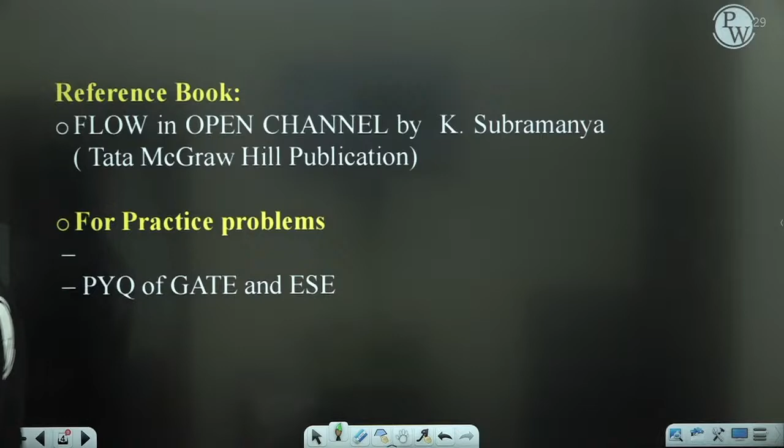Now, definitely you will be asking, sir, which books do we need to follow as a reference. First of all, as a reference, you can use any one book, don't go for multiple books, that is a time waster for you. So one book I am suggesting to all of you, which you can refer comfortably, is Flow in Open Channel by K. Subramanya, Tata McGraw-Hill publication.

This you can refer. And other than classroom questions, you are having GATE and ESE previous year questions, so that you can try for the practice part. With this course, these two things you need to do for every topic, every discussion: reference book and practice problems. I know you guys will be asking which books to refer, so this book you can refer.

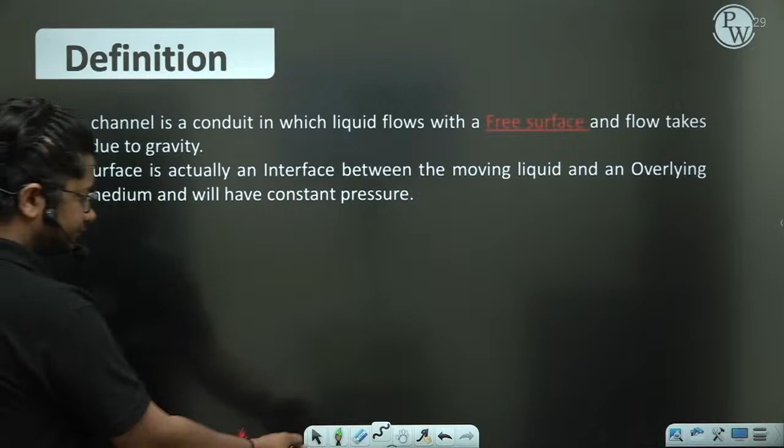Now comes the open channel flow technical discussion, introduction part. In open channel flow, if somebody asks you, sir, what is an open channel? Open channel is a conduit in which liquid flows with a free surface, and flow takes place due to gravity. You have already seen examples like river, irrigation canal, or any stream which is flowing; in all of those, one thing you will find common: these are nothing but a flow which has a free surface.

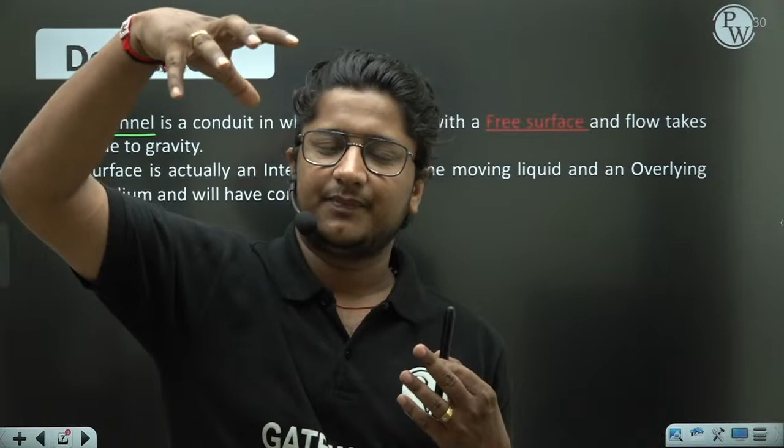Then what do you mean by free surface? Free surface is basically an interface. It is an interface between the moving liquid and the overlying fluid medium. In our case, the moving liquid is water and the overlying medium is atmospheric air. So that interface between the moving liquid and the overlying fluid medium, we are naming it as free surface. This free surface is like an identification mark.

Wherever it will be there, we can call it open channel flow. In open channel flow, it must be there. Without a free surface, you cannot call a flow an open channel flow. That should be very very clear in your mind.

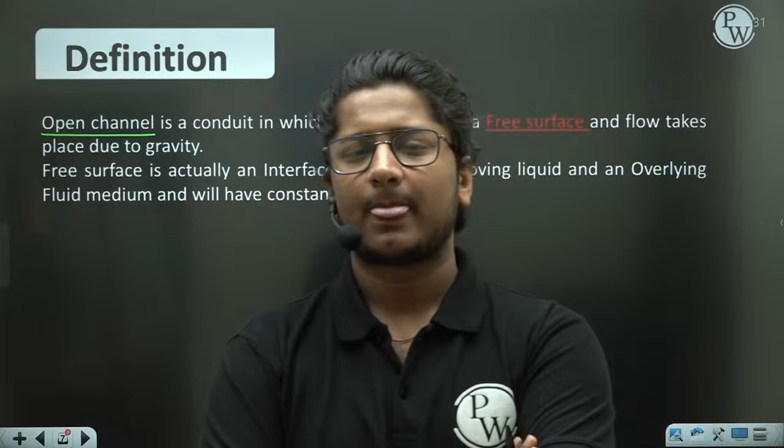Now, as it is a free surface, the pressure will be which pressure? Throughout the motion, throughout the flow, which pressure will it be carrying? The water will be carrying which pressure? I'm asking this to all of you. As it is a free surface, as it is open channel flow, in that case, on the top, which pressure will it be carrying?

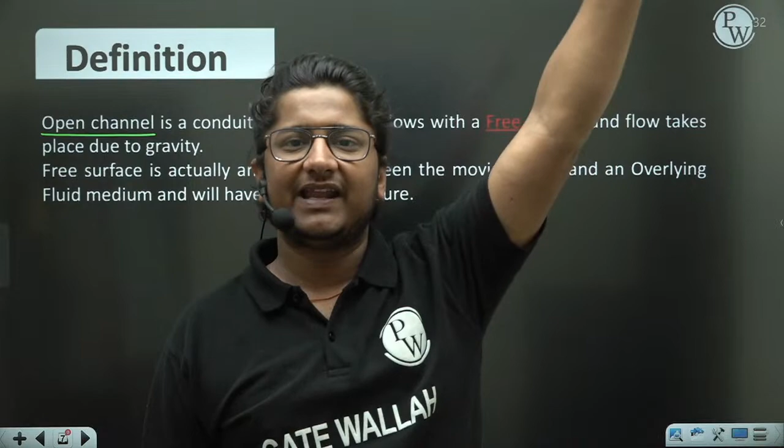Atmospheric pressure throughout the flow will be taken as constant, because generally we design for a particular length of the section of the river. In that particular length, atmospheric pressure is taken as constant. That does not mean that if a river like Ganga is flowing from Himalayas to Bay of Bengal, the atmospheric pressure will be same throughout. At Himalayas there will be different atmospheric pressure, and at Bay of Bengal it will be different. But if you are taking only 1 kilometer length, you will not find much difference in atmospheric pressure.

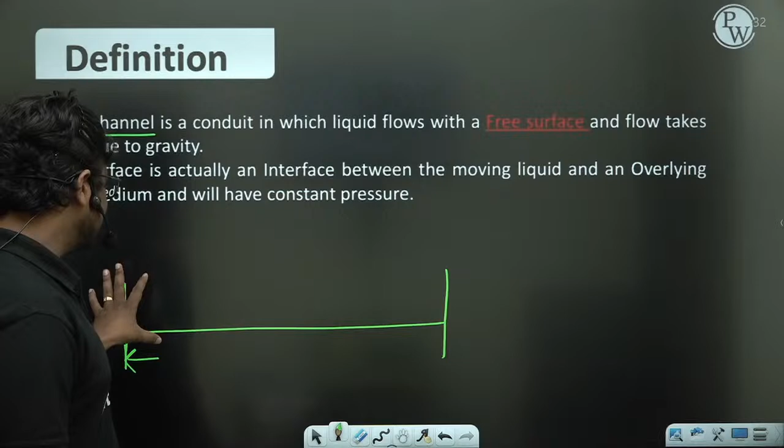For example, if you take this section of the river, say 1 kilometer, here and here you will find the same atmospheric pressure. But if you consider one point in Himalaya and one point in Bay of Bengal, then it will be a different atmospheric pressure. You guys already know this.

So free surface, open channel flow - what is the meaning of this? What is the general meaning of this? I think this is clear to all of you.

Another point which I have written here, which you can see, flow takes place due to gravity. Just like a river is always flowing due to gravity. Because pressure is the same only, elevation head is the only thing. That is the main reason I will say for the flow to occur.

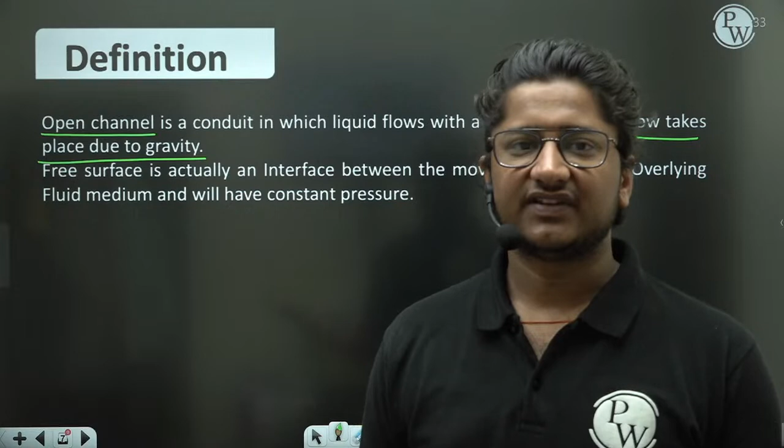That is the reason, if because of elevation difference the flow is occurring, that is nothing but because of gravity. It is like if I throw some water from the 10th floor, it will definitely go to the ground floor. Why? Because of head difference, elevation difference. So if elevation difference is the main factor for the flowing, definitely gravity forces will be in picture, and if gravity forces are in picture, this part you will study later.

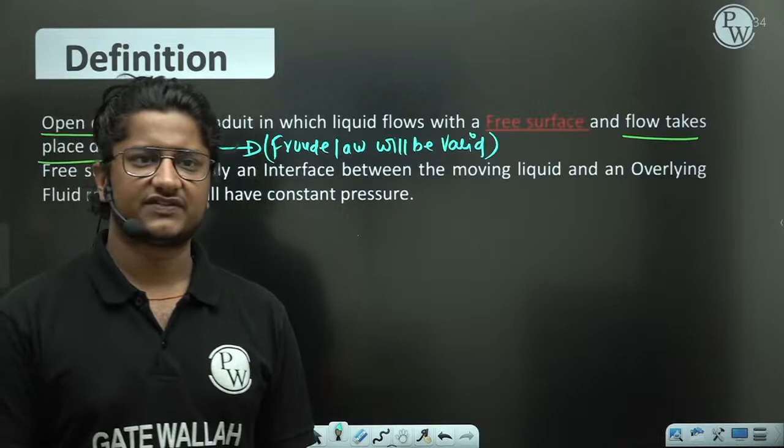If gravity force is in picture, Froude law will be valid. This part you will study later in the dimensional analysis chapter for fluid mechanics. But here also I can tell you that wherever gravity forces are important, Froude law will be important, because Froude number is root under inertial force upon gravity force. This formula you will study in dimensional analysis chapter in fluid mechanics. But this part you can remember, that Froude law will be valid.

Okay, I think this is clear to all of you. Now comes the practical situations of OCF. So many examples already I have given to you, you guys can note down those examples. First example is like sewer - sewage flow in sewer line.

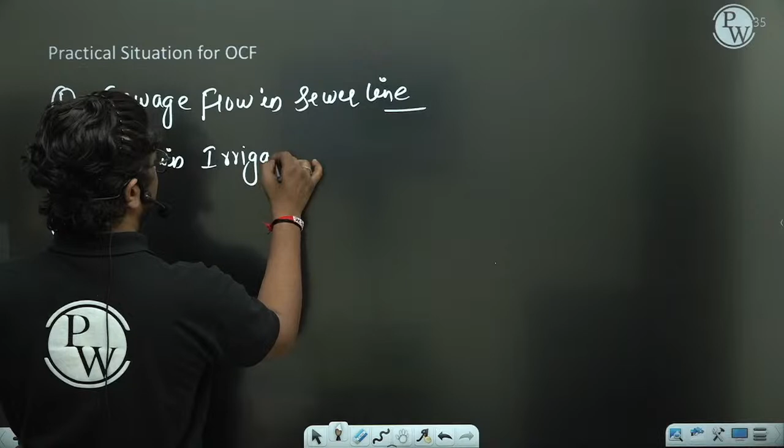Irrigation canal - flow in irrigation canal. Flow in a river. These all are nothing but examples of OCF, examples of open channel flow. Any other example?

Bharat Sharma, you wanted to study SOM first, but right now I am teaching OCF, so first focus on this. Whichever topic is coming to you, first focus on this. Whenever SOM will come, that also you can study.

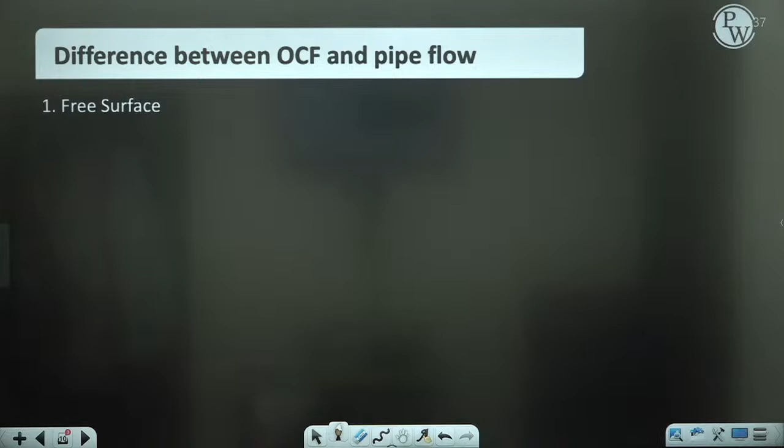Now the next thing is difference between OCF and pipe flow. See, whenever a new topic comes, we always compare it with things we already know. So why are we comparing open channel flow with pipe flow? Because pipe flow is something already known to all of you. Now we are comparing OCF with pipe flow so that we get a much clearer picture for the OCF part, and we get some new points related to the OCF part.

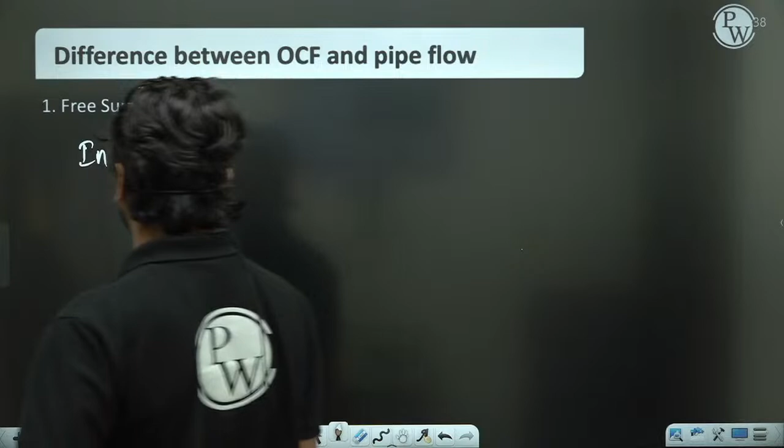First thing is the free surface, which I already discussed with you, so write down that part. In pipe flow, meaning in a pipe, complete full depth flow is occurring - that is called pipe flow, where pressure dominating flow is going on. So in pipe flow, no free surface will be there.

In OCF, as I just told you, free surface will be present.

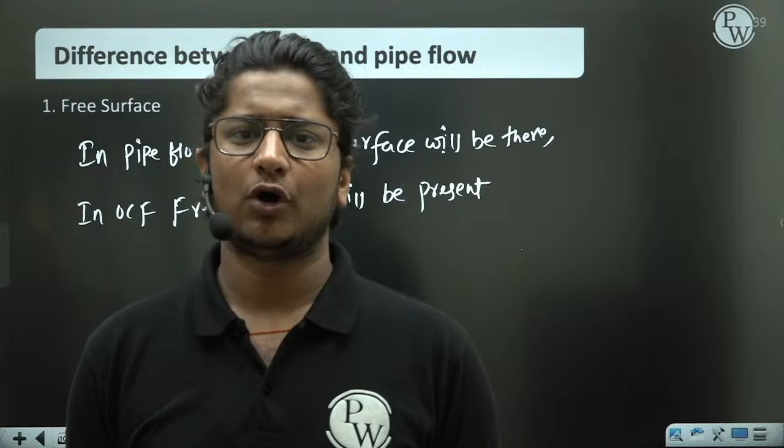Sir, is oceanic current an example of open channel flow? See, wherever in open channel, like for example surge, tidal waves, these are examples of OCF only. These are examples of open channel flow only. Is that clear, Ajay? Now in OCF, free surface will be present.

Now this statement you guys are already knowing. Something extra which I am giving to you is regarding pressure. In OCF, throughout the flow, atmospheric pressure is prevailing.

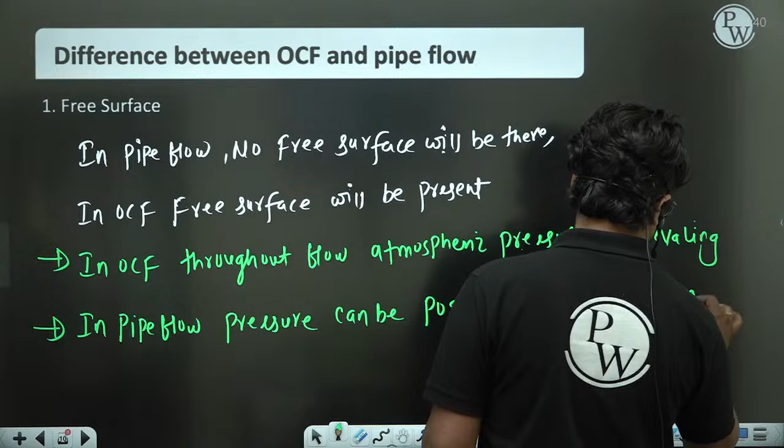In pipe flow, pressure can be positive or negative. What do you mean by this? Like in a pipe flow, pressure can be sometime positive, more than atmospheric pressure, positive gauge pressure, sometime negative gauge pressure, or sometime it will be less than atmospheric pressure. Like in siphon pipe, negative pressure is there, so it is less than atmospheric pressure. Sometime it will be more than atmospheric pressure.

So in a pipe, both type of pressure can exist, but as in OCF, it is a complete free surface flow. So in that case, only atmospheric pressure will be prevailing. No, neither positive nor negative. Is that clear? So this point, this new point, or I will say a very important point, just note it down, my dear.

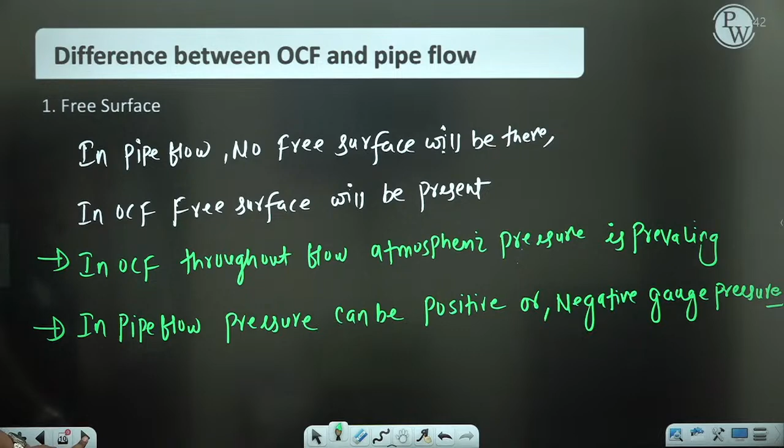Okay. Is it noted? Is it noted for everyone? Is this part noted for everyone?

First, the first difference I think it's clear to all of you. Now the second difference we are talking about is the direction of flow. Now listen, directly write down the statement first. We will discuss this part, but first write down the statement. In OCF, flow takes place due to...

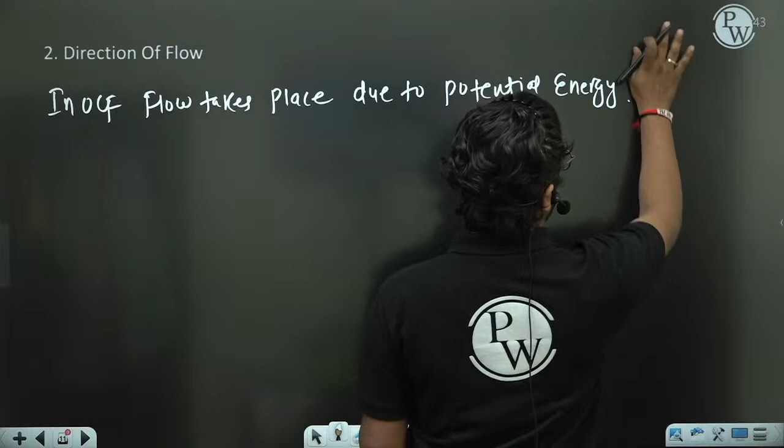potential energy gradient. In pipe flow, flow takes place due to total energy gradient. What do you mean by this?

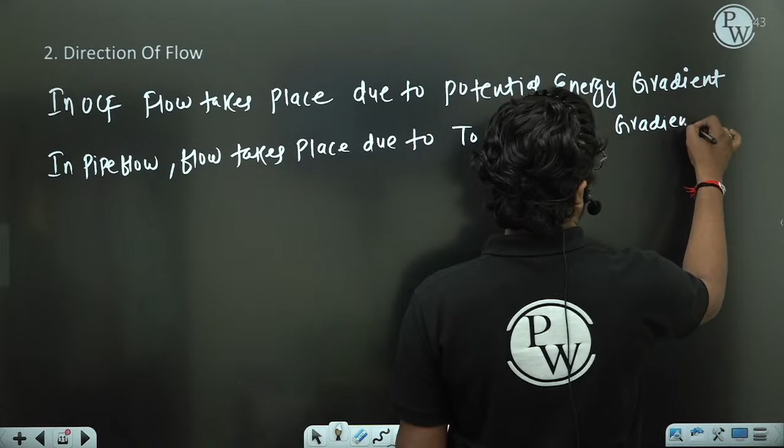In a pipe flow, if flow is occurring from one point to another point, that means there will be some total energy difference, total energy gradient, then only the flow is occurring. What do you mean by total energy? That means pressure head plus velocity head plus elevation head, P upon rho g plus V square upon 2g plus z. This is something we are calling total energy. But in OCF, only the potential energy gradient is important for all of you.

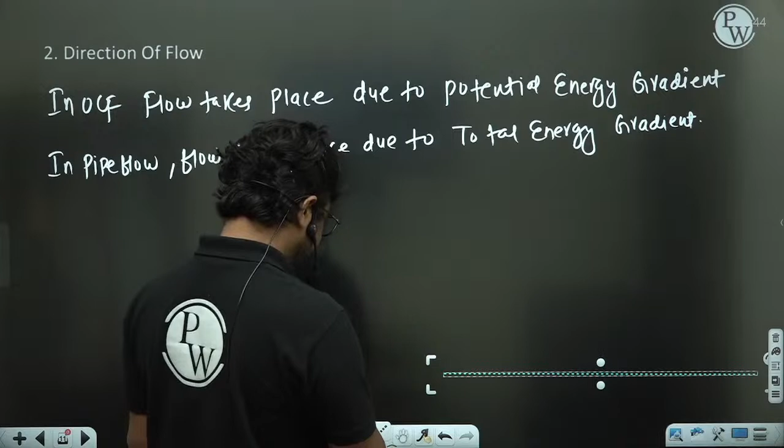Now try to understand this part in a form of figure. So let me draw. Now this is the datum. This is the channel bottom. This is the water surface line. And this is the total energy line.

As you know, complete atmospheric pressure will be there, so this is the water surface line also. The same line we also call as hydraulic gradient line. This we call as total energy line. And this is nothing but the channel bottom.

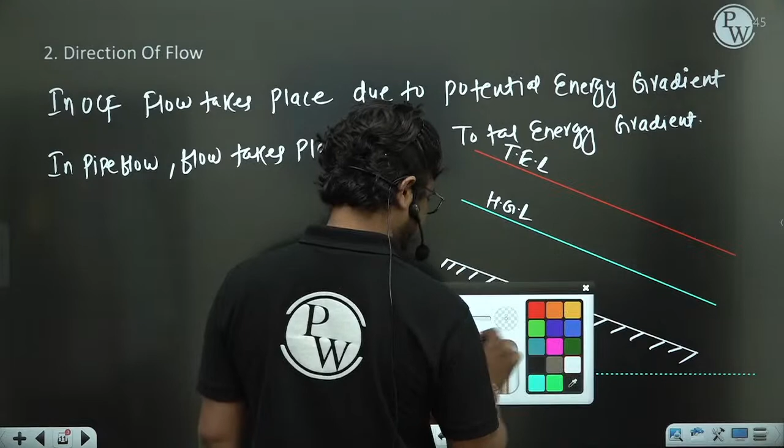This is the depth, or you can say Z, this is the elevation part. This is the depth of flow. And this is the velocity head. When you talk about pipe flow, generally we write P upon rho g. But as it is atmospheric pressure, here P upon rho g will be nothing but the depth only.

So pressure head plus elevation head, this complete will give you piezometric head. You guys are already knowing about piezometric head, but those who don't know, they can note it down. Piezometric head here is Y plus Z. This we call as piezometric head.

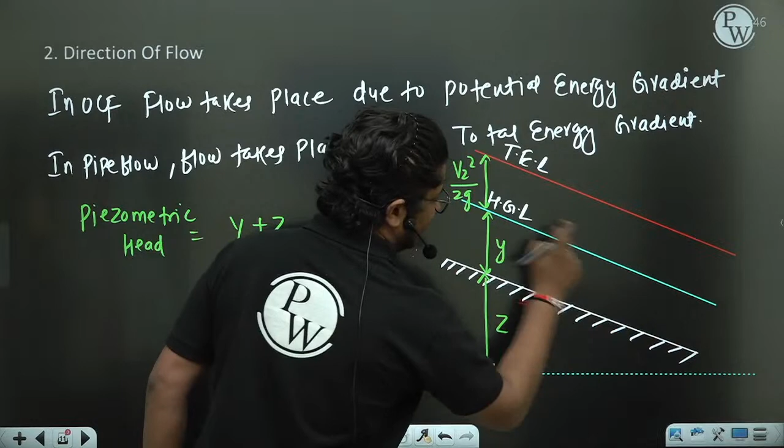And this water surface line is actually, you can see like this, this hydraulic gradient line is coinciding over the water surface line. So HGL means hydraulic gradient line, and hydraulic gradient line is actually representing the piezometric head. Throughout the flow, wherever the piezometric head will be there, if you join all those points, you will get hydraulic gradient line. Here specifically in open channel flow, this hydraulic gradient line is lying over the water surface only. So water surface line and HGL line are coinciding in OCF only. It is only possible in OCF, not in pipe flow.

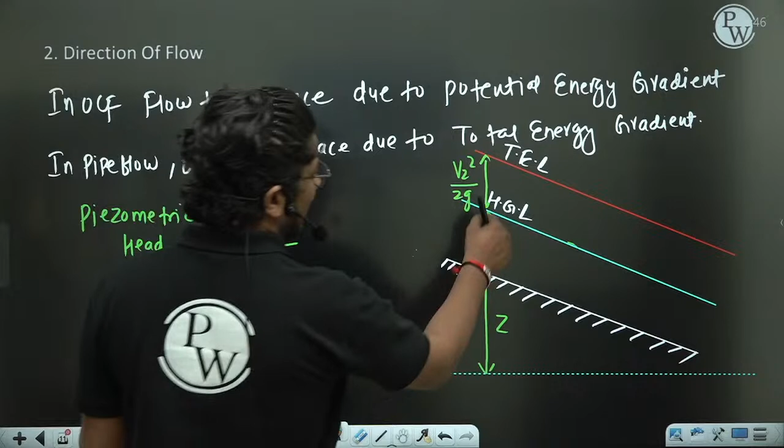So HGL, TEL, this you have understood. What about total energy line? So at every section you will be having different total energy value throughout the flow. If you connect all those points, you will get a line that we are calling TEL.

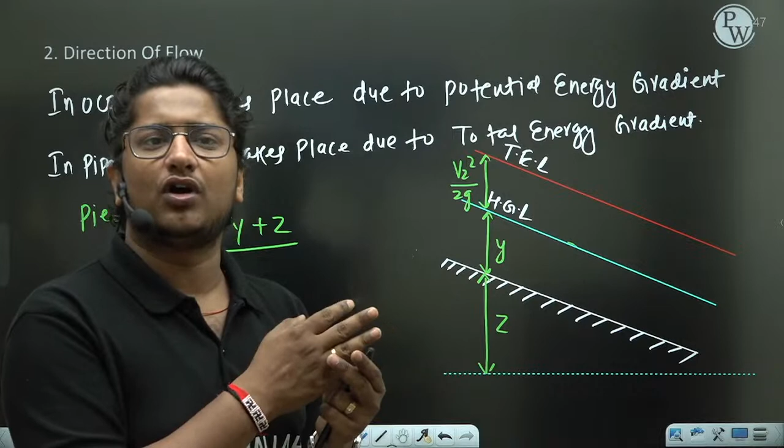So TEL, HGL, potential energy head, piezometric head, total energy head - these concepts are clear now, because this part is already discussed in pipe flow. For those who have not completed the pipe flow chapter from anywhere else, I am telling these points. So what do you mean by TEL? What do you mean by HGL? What do you mean by piezometric head? Is it clear to all of you?

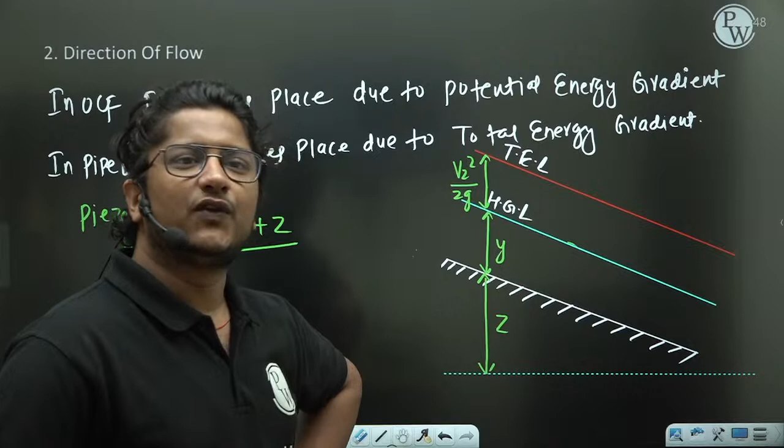Okay, very good. So now piezometric head you have understood, total energy head also you have understood, everything you have understood. Now in general, we say flow occurs when there is a difference in total energy head. So let us talk about this condition.

So two sections I have taken. One section is at this point, another section is at this point. So you want flow, sir? Flow I want. So in flow case, for flow to occur...

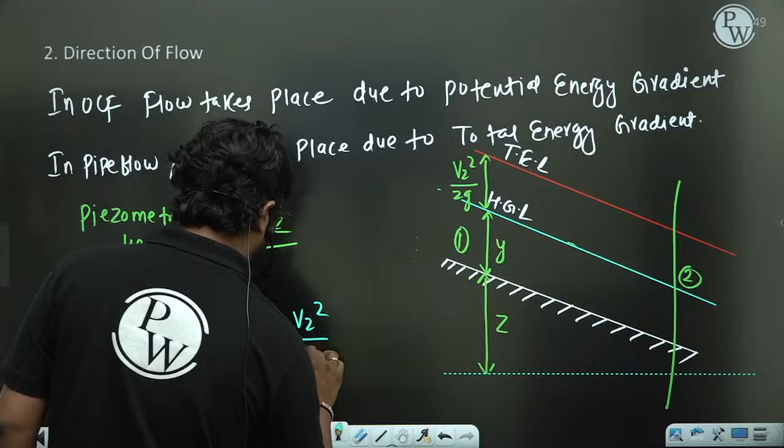P1 upon rho g, or in place of P1 upon rho g, directly I am writing y1 plus V1 squared upon 2g plus Z1. If you want flow from 1 to 2, definitely at 1 you will have more total energy head, at 2 you will have less total energy head. So this will be greater compared to y2 plus V2 squared upon 2g plus Z2.

If you want flow to occur, here the total energy will be more compared to 2. Is that clear? Now in this, some extra condition what we are adding here.

Look at here. Generally what we have seen is, if you are dealing with 1 kilometer length of river, in a 1 kilometer length of river, you will not find much difference in the depth part. Like for example, if you have taken a 2 kilometer or 1 kilometer stretch of the river, depth will not be changing. So we can call that depth is constant, depth is not varying.

So if depth is not varying, in a particular stretch, or in a particular section, or a particular length of the river also you can say.

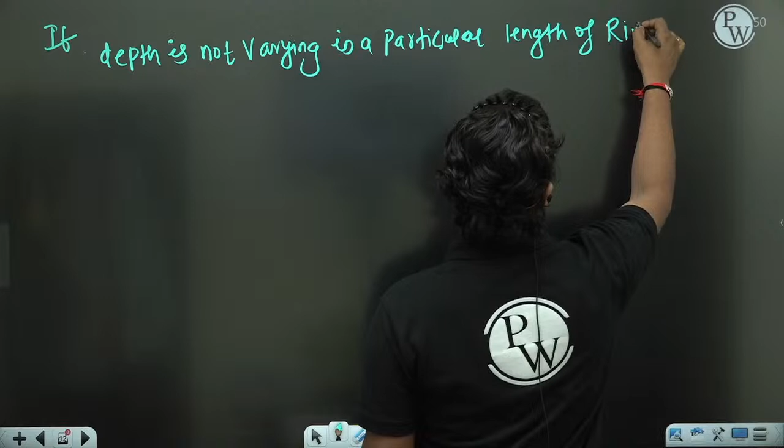So if depth is not varying, my dear, Q is already constant. Discharge we have already taken constant. So can I say that even velocity will be also constant?

Because V is what? V is discharge upon area. As depth is constant, Q is constant, width anywhere we are not changing. So can I say that if depth is constant, even V is also constant in that case? Can I say this? So if depth is constant, V is also constant.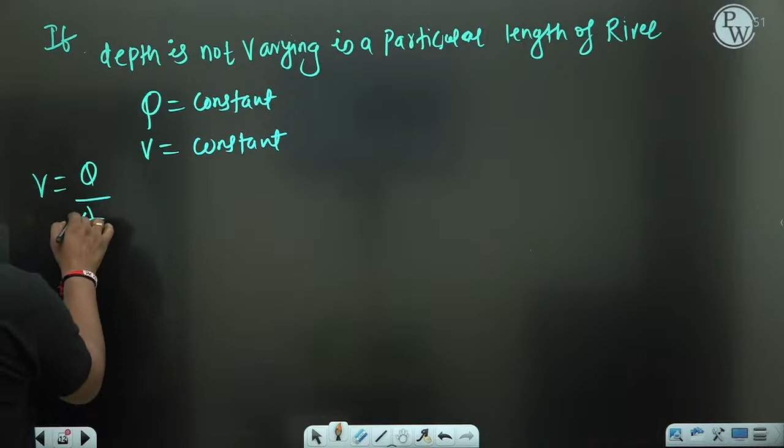Both are constant here. So in that case, my dear, V is equal to Q by A. So if depth is not varying in a particular length of river, Q is equal to constant, V equal to constant. So if Y and velocity, these two things are constant only, then these parts we can remove it now.

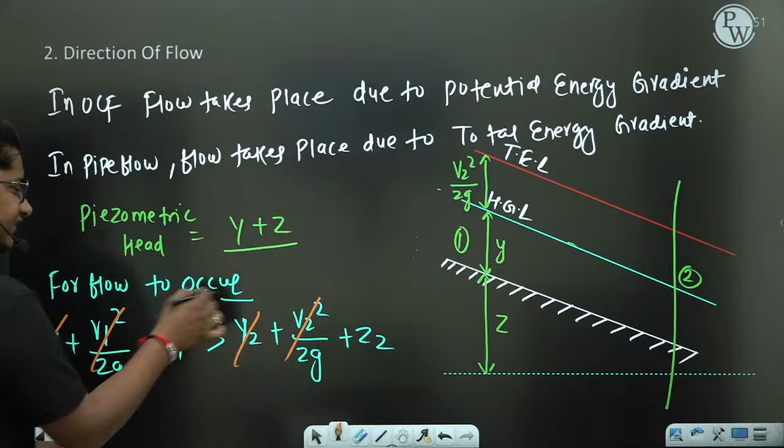These parts we can remove it, anywhere this is constant only. So Z1 and Z2. After that, what we are getting here? Z1 greater than Z2. What do you mean by this?

If flow is to occur, Z1 should be more than Z2. What do you mean by this? It is a gravity flow. When flow is occurring only because here Z1 is more, here Z2 is less, in that case we can call this gravity flow.

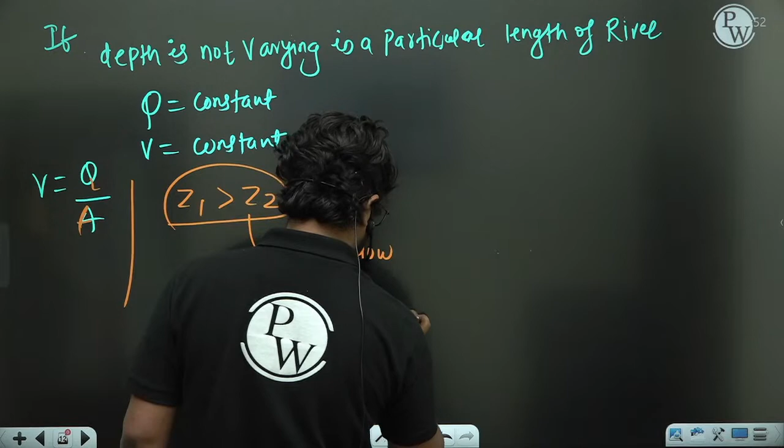Okay, so as a note, you all can remember this thing which I am telling you. First point: HGL will always coincide with the water surface in open channel flow.

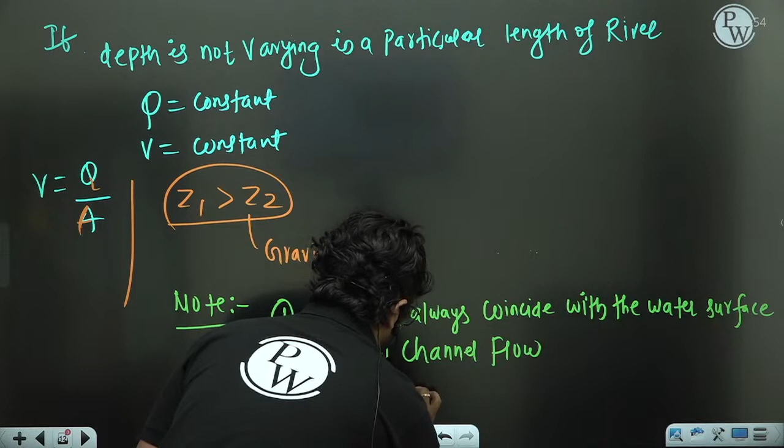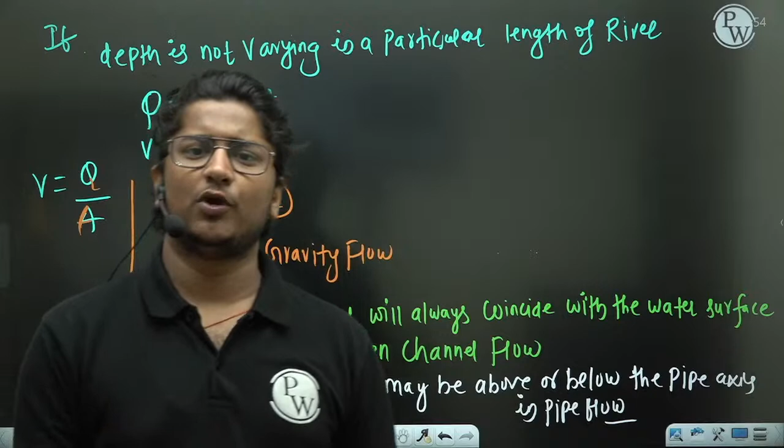HGL will always coincide with the water surface in open channel flow. Second point, HGL may be above or below the pipe axis in a pipe flow. In pipe flow, the HGL line will not always be on center, not always on the pipe axis. It can be above the pipe axis, or sometimes below the pipe axis. If there is more pressure, positive pressure, it will be above the axis. If negative pressure, it will be below the axis. So HGL may be above or below the pipe axis in pipe flow, but in open channel flow, HGL will always coincide with the water surface.

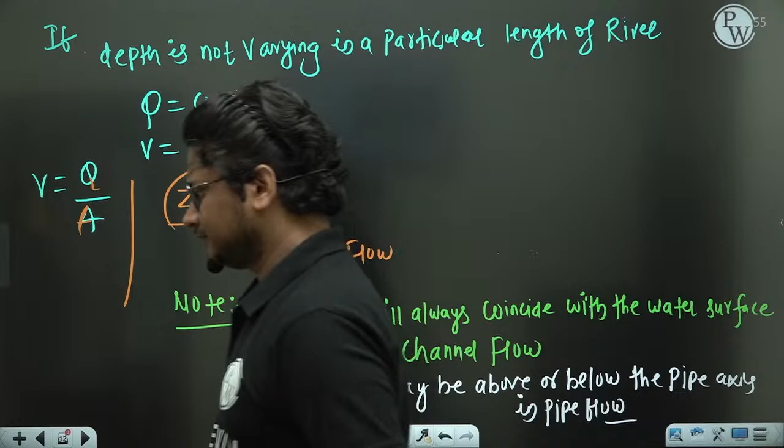This point you need to remember. Is it clear now?

So direction of flow, that is the second basis of difference that we have understood. Now we are going to the third basis for this difference. Based on velocity distribution, how open channel flow and pipe flow are differentiated, that we are going to see in this part.

Look at how the velocity distribution is there in open channel flow first. I will be discussing about open channel flow. This is the channel section. I'm showing the velocity distribution to all of you.

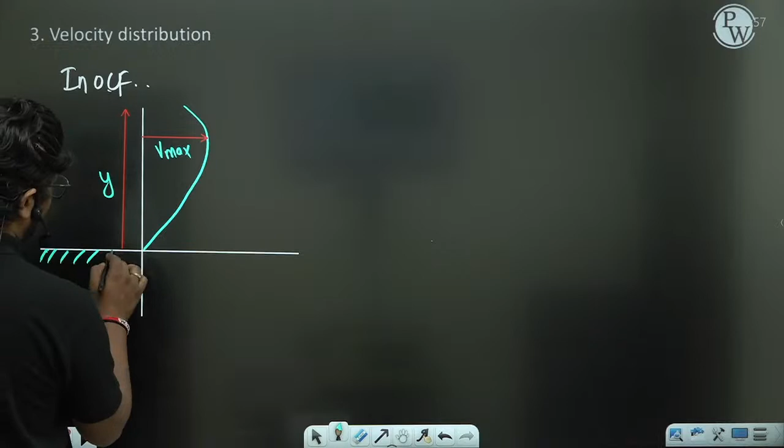Here you are finding the maximum velocity. This is the depth part. As you are going away from the bottom line, your velocity is increasing, and according to this logic, on the top you will find the maximum velocity. But as you can see in this velocity diagram, the maximum velocity is not at the free surface. It is somewhere below the free surface. Generally this distance is taken as 0.05y to 0.25y.

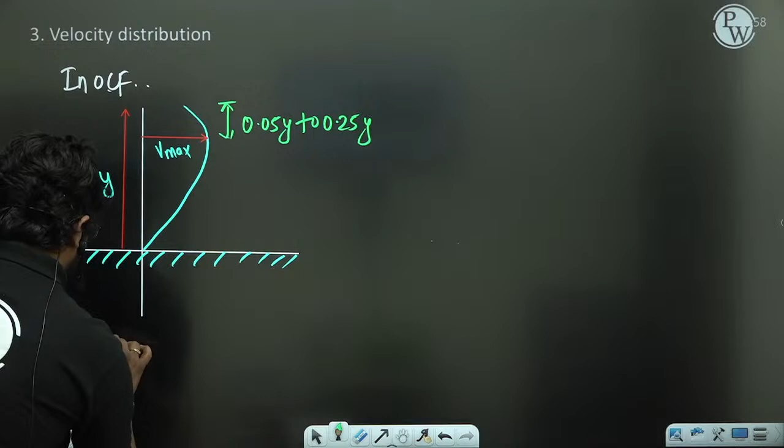So first statement, if somebody asks you: generally in open channel flow, flow is primarily turbulent flow. That's why you know that in turbulent flow, the velocity distribution will be logarithmic. So generally in open channel flow, flow is primarily turbulent, that's why velocity distribution is logarithmic.

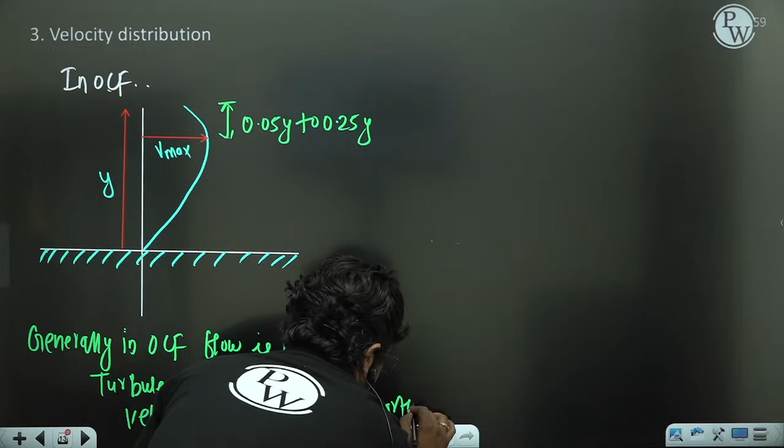Now here we are not getting the maximum velocity on the top, we are getting it somewhere below the top. Why? Can anybody give me the reason why? According to the logic, as you are going away from the disturbances, your velocity is increasing from the bottom to the top. But with this logic, on the maximum top surface, you need to find the maximum velocity. But that we are not getting. We are getting it somewhere below the free surface. So what is the reason behind it? What are the possible reasons? Anybody who can help me? What is the possible reason here?

Reasons for maximum velocity not at the top surface. What are the possible reasons, my dear? Anybody who can help me?

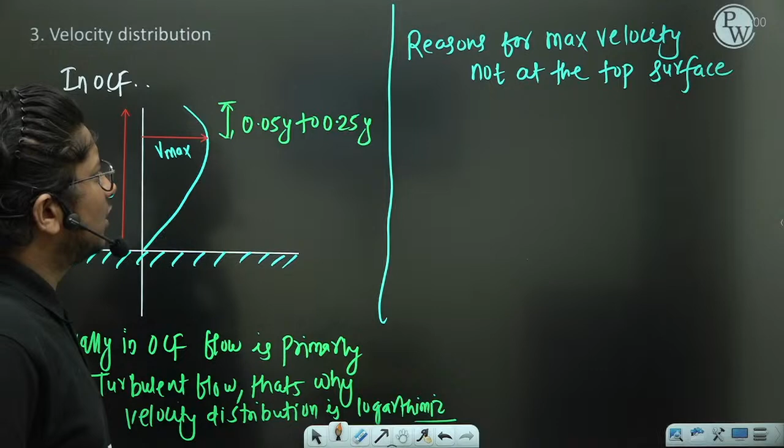Velocity decreases with contact of atmosphere, that is one of the things, but what is the reason? Why does contact with atmosphere decrease the velocity? Not always. But why does atmosphere make an impact on the velocity? It is because of wind resistance. You need to always say the basics: wind resistance.

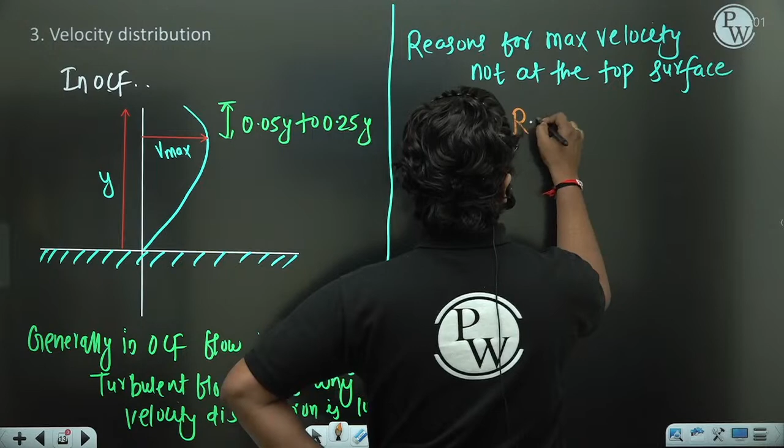Second thing will be the boundary friction. In whichever channel the water is flowing, there will be some boundary friction. Third part will be the surface tension. Surface tension is nothing but, on the top, on the outer surface, we have a layer which is completely stressed out, and that stress layer is not allowing the water to flow freely. So these are the three possible reasons why the maximum velocity in open channel flow is not at the free surface.

Is it clear till here to all of you, my dear?

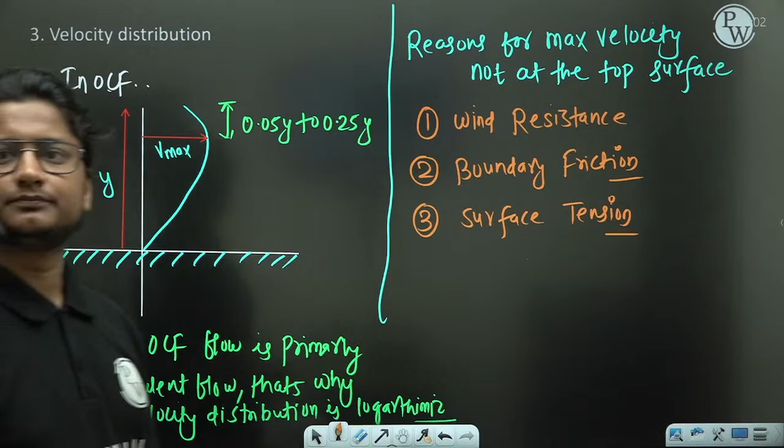Clear? Have you noted?

Now I will be giving you a condition where you can get this 0.05y to 0.25y. This thing, something I will give it to you.

So let us see the condition here. One, we have a section, we call this section as narrow but deeper section. How does it look like? Like this. Sometimes you will find drains are, depth wise, more, but width wise, less. So narrow but deeper section.

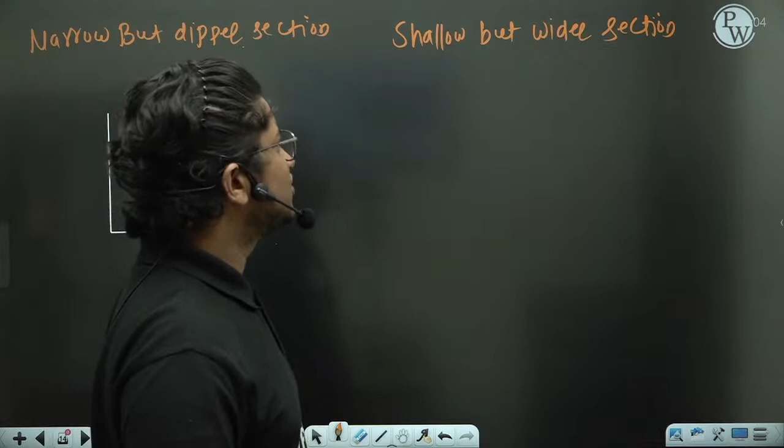Another section we are writing as shallow but wider section. Like Ganga is flowing. If Ganga is flowing like in Patna, even Kolkata, Banaras, in these areas you will find the river section is shallow but wider section, very long length.

So it is like this. It is like this. In both, flow is occurring.

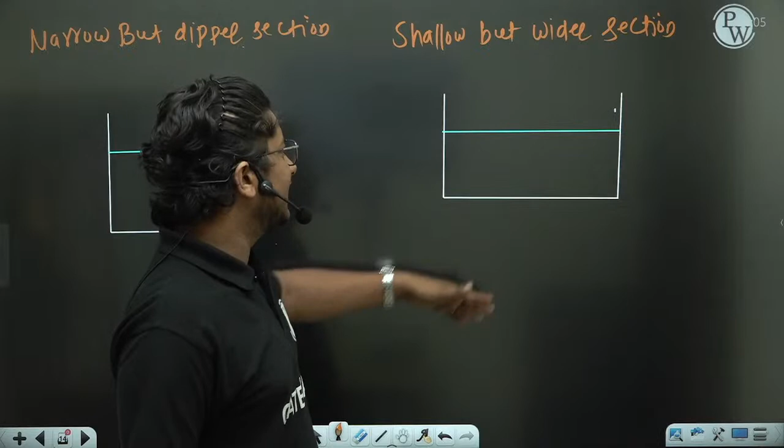Now, if I will ask all of you, in which case side resistance is less, or in which case side friction is less? This is nothing but a shallow but wider section. Example, Ganga river flowing in Patna or in Banaras or in Kolkata. Width will be more compared to the depth, very much high. Here you can write B is very much greater than Y.

Here you can write B is lesser than Y. This condition you can follow. So in which case will you find less friction? In which case will you find less friction?

Now try to understand, my dear. This you can understand with a basic example. For example, center velocity, or center flow, you are focusing here. On the bank of the river, if you are giving a small disturbance like this, just touching the water on the bank of the river, do you really think it will make an impact at the center?

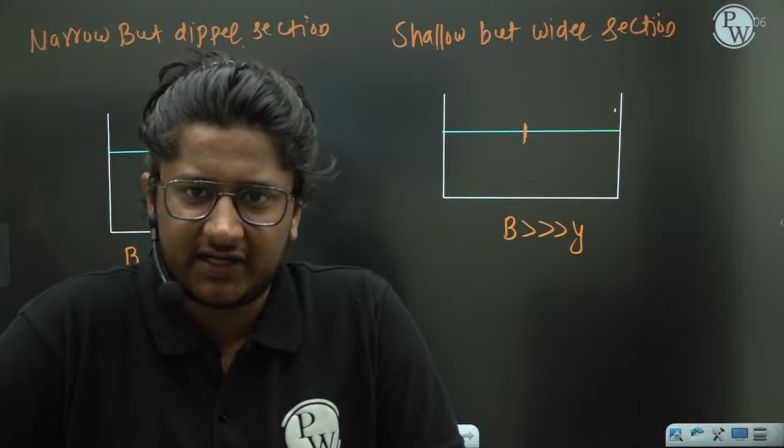In a river like Ganga and all, if you are touching the water, if you are giving some resistance to the water on the bank of the river, do you really think that impact will be there at the center also? No. Is that clear? So you can understand here, side friction effect is not so great.

So I can write it like this: side friction is less.

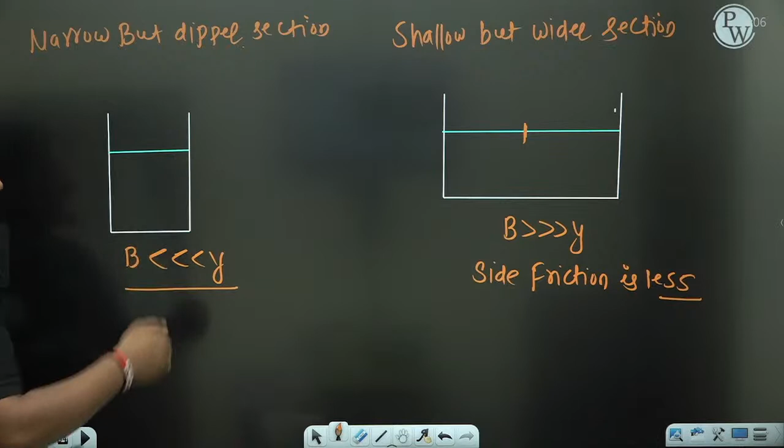Here in a narrow section, even if you give a small disturbance at the corner or at the side, there will be some disturbance at the center of the flow also. That means the side friction effect is predominant. The side friction effect is not less, it is very, very important, I will say. So here I can write side friction is more dominating.

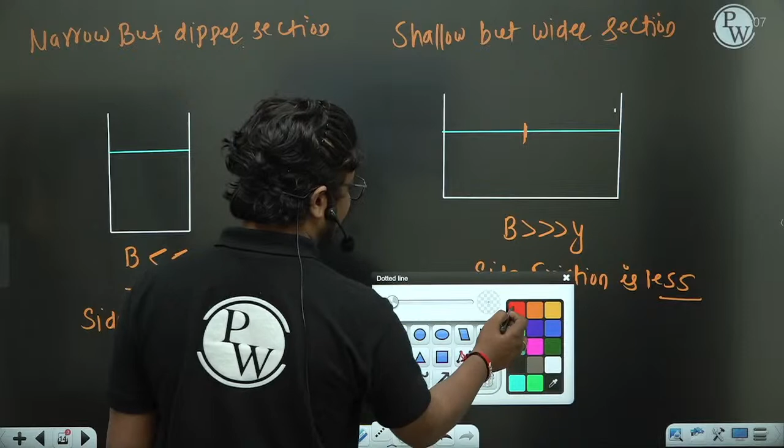Is it clear? And because of this you can see here, if side friction effect is more, the maximum velocity will go at a much deeper section. But if side friction effect is less, this maximum line, the dotted red line showing the maximum velocity point, will not be much below the water surface. It will be only 0.05y distance. Here it will be 0.25y distance. Is it clear, my dear?

Is it clear, my dear? Okay.

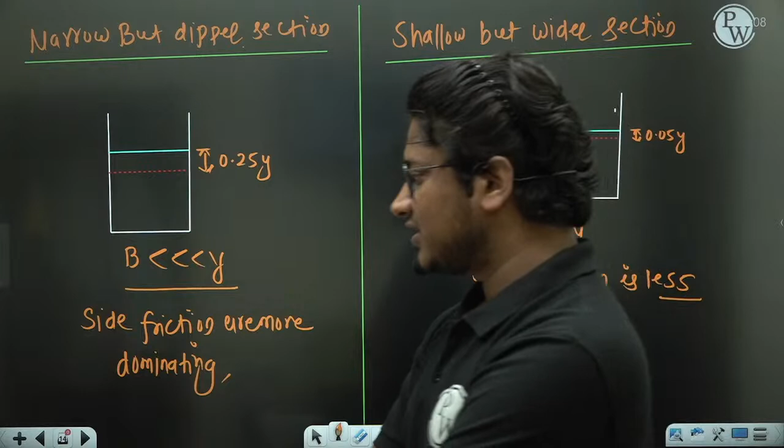Now, here only one extra point I'm telling you. One extra point which I'm telling to you.

Here you will find maximum velocity here. Oh sorry, not maximum, average velocity, at 0.6y distance. So this we have found it experimentally, or by observation, that at 0.6y distance below the free surface, we are always measuring distance from the free surface.

So 0.6y distance below the free surface, we are getting the average velocity. Why are we more focusing on average velocity? Because if you need to find out discharge, area into velocity, that velocity should be average velocity. So that is the reason we are finding this average velocity.

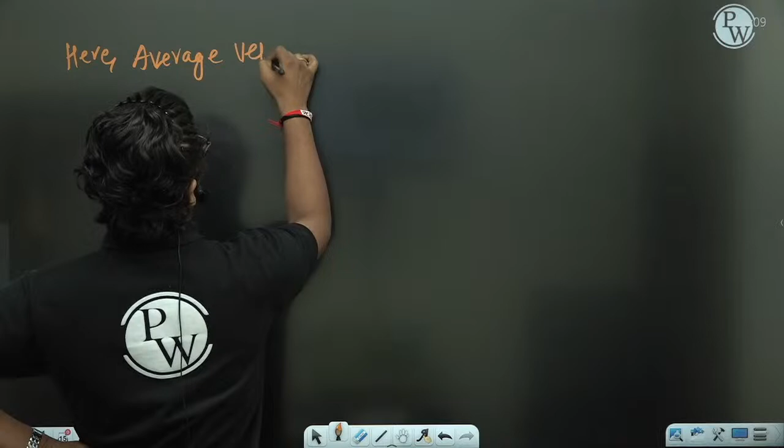So first thing you need to write down here: average velocity will occur at 0.6y distance below the free surface.

Now the thing is that if you want to find out average velocity, what you have done, V average will be equal to V at 0.6y. This point is clear to all of you.

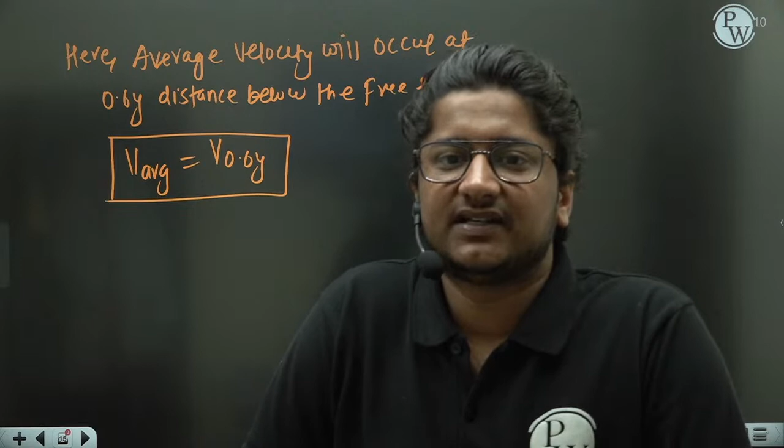But what happens if you directly go to the 0.6y distance and try to measure the velocity, you will be having some error also. So in this case, we have made a new experimental method. That's something we are calling the 2-point observation technique. And based on that, what we are doing, look at my dear, we are finding the average velocity.

So 2-point observation technique. 2-point observation technique.

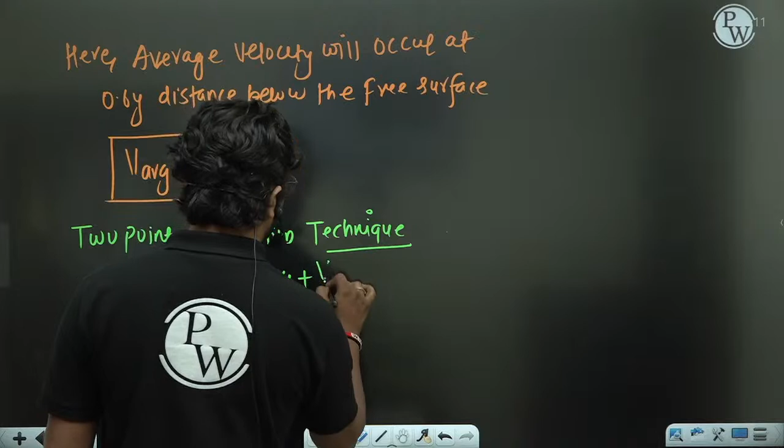2-point observation technique or method. So V will be equal to V average, equal to V at 0.6y, and that we are writing it as V at 0.2y plus V at 0.8y divided by 2. So basically, instead of taking 1 point or 1 observation, we are finding out 2 observations, and taking average of that will give you the average velocity, that is 0.6y distance. So V at 0.2y below the free surface plus V at 0.8y below the free surface, divide by 2, you will get this. So this is nothing but the experimental way to find out the average velocity. Is it clear to all of you, my dear?

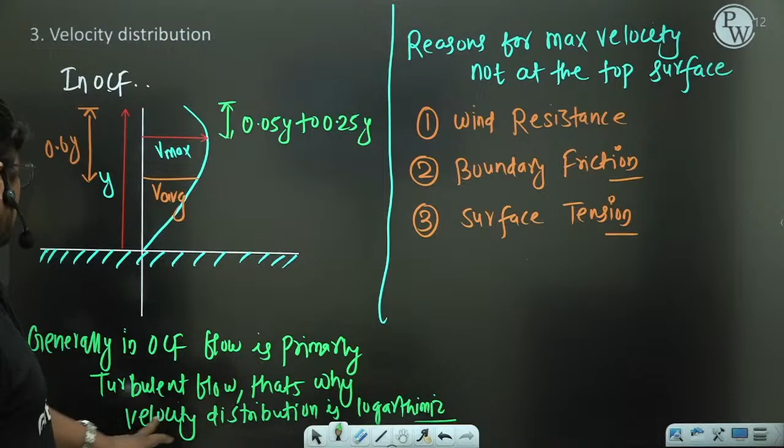Clear? So as we are making a difference between pipe flow and OCF, whatever we have discussed till now, this is complete regarding the OCF. Not in detail, but at least we need to give a small diagram for pipe flow also.

So in pipe flow, we have two options, you guys are already knowing about this. Parabolic distribution will be there for laminar flow. And this is for the turbulent flow.

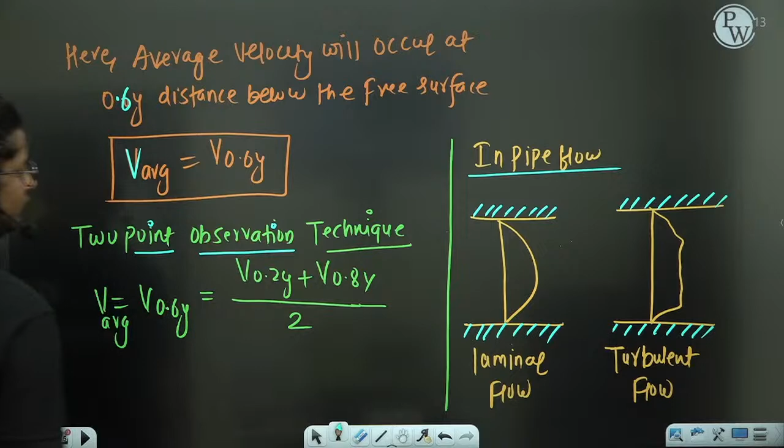So in laminar flow, you know this, this is something we call as parabolic distribution. And this is something we call as logarithmic distribution in a turbulent flow. These things you will discuss in pipe flow in detail, but as we are making a difference between pipe flow and OCF, I need to give the point for pipe flow also. So that is the reason I am giving a small part. Mainly we are discussing the OCF related things.

Okay, have you noted this thing? Have you noted these things completely?

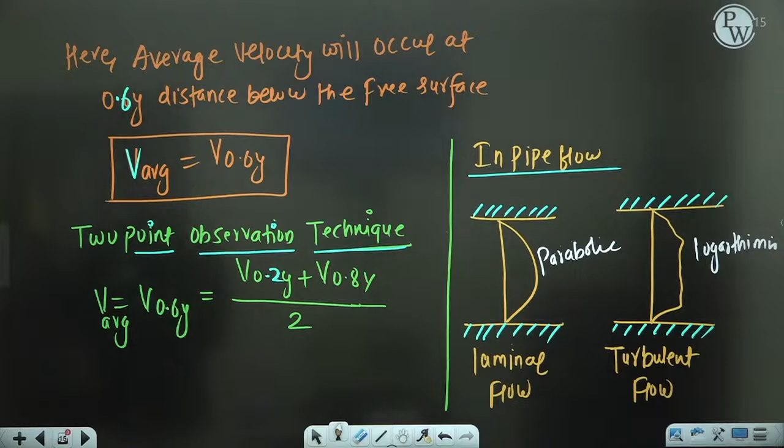Completed? Okay, so now we are going for the next basis, that is the shape of the channel. So I don't need to write much about this. You guys have already seen different types of shapes in open channel flow, like one shape is like this, parabolic, rectangular, sometimes triangular shape also, sometimes trapezoidal also.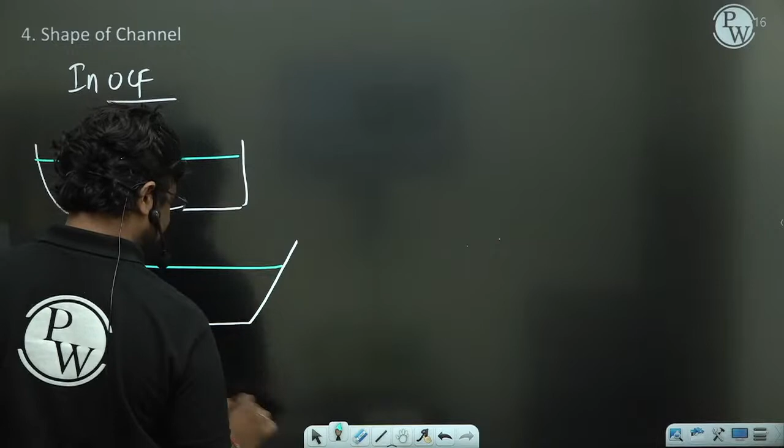So different shapes you will find. In pipe flow, generally you will find circular only. So one question I'm asking to all of you regarding shape, for example, depth of flow is up to this, up to this, up to this. Free surface is up to this. This is a sign for the free surface, or you can say water surface here.

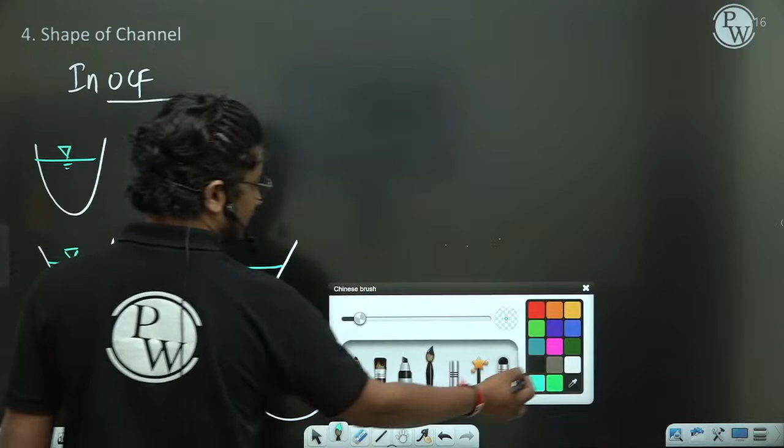Tell me, out of 1, 2, 3, 4, 5, 6, 6 diagrams I have shown to you. I'm giving a number to all the diagrams: first, second, third, fourth, fifth, and sixth. Which one is OCF and which one is not?

In shape of the channel, Dhrumin is telling, sir, only fifth is not. Why? Why is fifth not an open channel flow?

Because, sir, here free surface is not there. Ajay is telling, sir, 5 and 6 is not open channel. Why? Why not 6? In 6 we have the free surface.

In a sewer line, complete closed flow is occurring. Complete pipe is closed, na? But still open channel flow is occurring, na? Because full depth flow is not going. In a sewer line, we never expect flow to be full depth flow. If full depth flow will be occurring, that means there will be no free surface, that means it will be called as pipe flow, not as open channel flow. If you look at diagram fifth, full depth flow is occurring. If full depth flow will be occurring, there will be no chance of making a free surface, na? So fifth one is not an OCF. This is not an OCF.

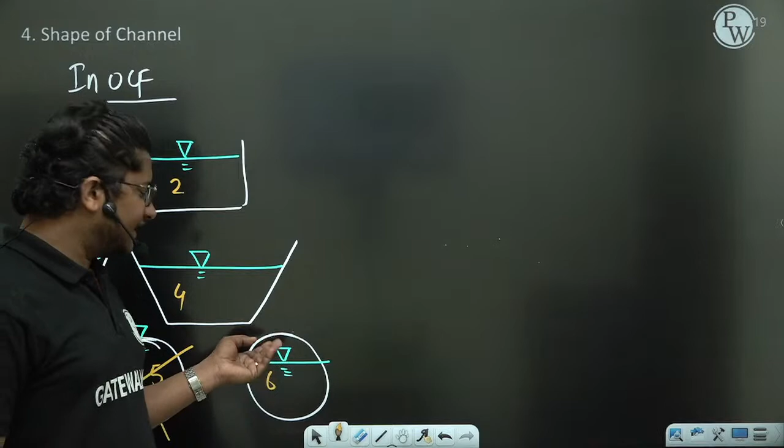It is not an OCF, it's a full depth flow. So this is a pipe flow, not OCF. Here it is a partial depth of flow, so there is space for the air. Wherever there is space for the atmospheric air, definitely the free surface will be there.

Always remember, open channel flow does not mean the channel will always be open; a closed section like a sewer line can also be OCF. In a circular pipe, a closed section, sewer is flowing, but it is flowing with a partial depth, not with full depth of flow. So in that case, we can call that OCF. If it is a full depth flow, we cannot call it OCF. That point should be very clear in your mind.

I hope it is clear to you, my dear. Is it clear, my dear?

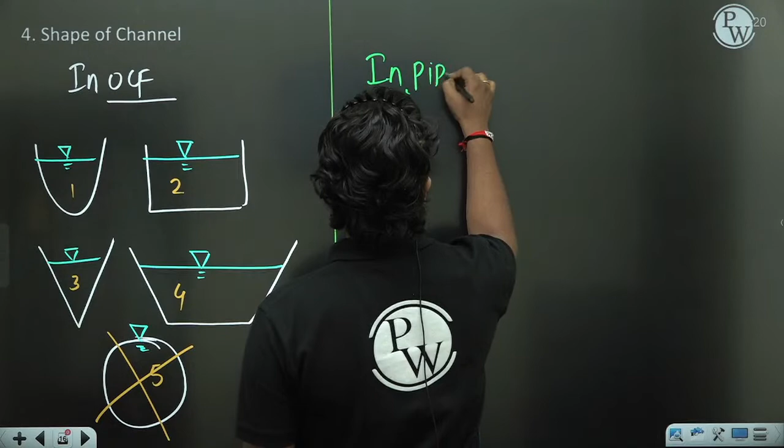In pipe flow, the section will generally be circular. We generally prefer circular sections. But that doesn't mean it will always be circular. Can anybody tell me why we always prefer a circular section, and why not other sections?

Least perimeter. Very good. Very good, Dhrumin. Very good.

Understand, circular section offers minimum perimeter for a given area. If you take the same area and plot a square, rectangle or other shape, you will find the circular section gives the minimum perimeter. So what is the advantage of minimum perimeter? If it is minimum perimeter, minimum resistance will be there, and if resistance is minimum, more discharge can flow. At the same time, if minimum perimeter is there, cost of construction will also be less.

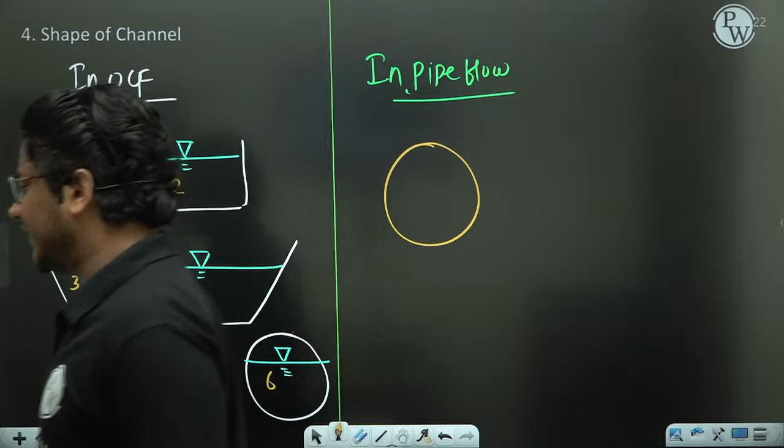Out of four, one more thing: in shape of the channel, two different sections we have given names - one we call prismatic channel, another we call non-prismatic channel. For example,

In your village you will find two types of canals. One canal will be unlined, meaning the lower surface is not concreted or with bricks - it's completely open soil. In that case, if it is an unlined canal, whenever rain comes, the cross section, slope and shape of the canal will change during the rainy season. But if you talk about a lined canal, in the rainy season also, the shape, size and slopes remain the same.

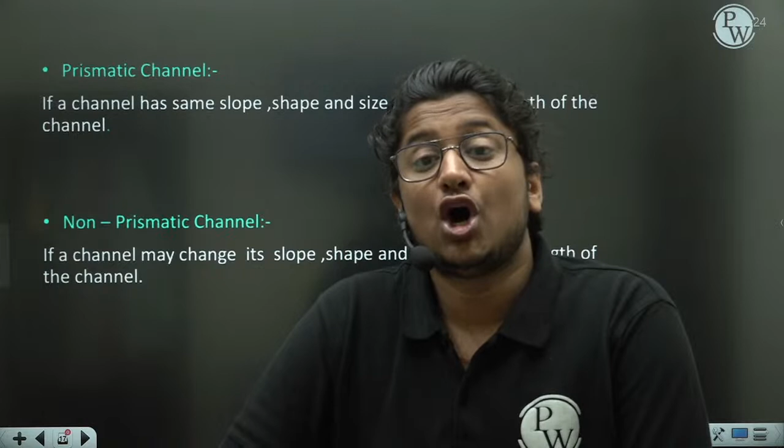It is not changing - that is what you need to understand. So lined canals are prismatic canals, where shape, slope, size all are same throughout the flow in the channel. And if shape, size, slope are changing along the length of flow, we call it a non-prismatic channel. So whatever we discuss in open channel flow, we assume it as prismatic channel, because in a non-prismatic channel nobody can give a complete idea. So most of what I am discussing, 90% or so, will be for the prismatic channel, not the non-prismatic channel. Is it clear, my dear? So in the shape part, you can note down these points - we have divided channel into two parts: prismatic channel and non-prismatic channel. I hope you guys have understood.

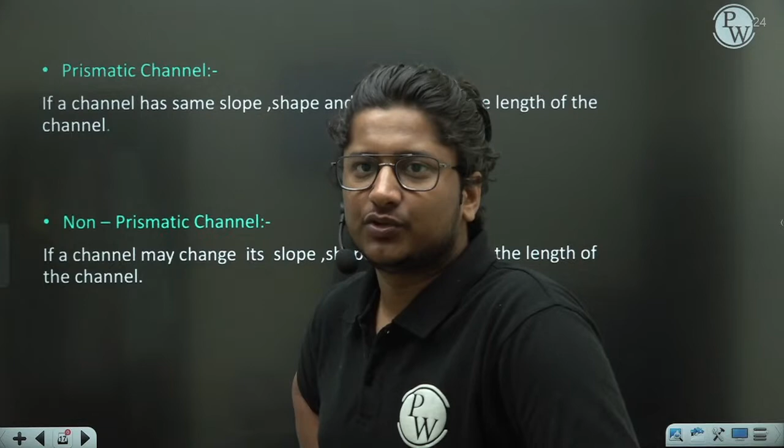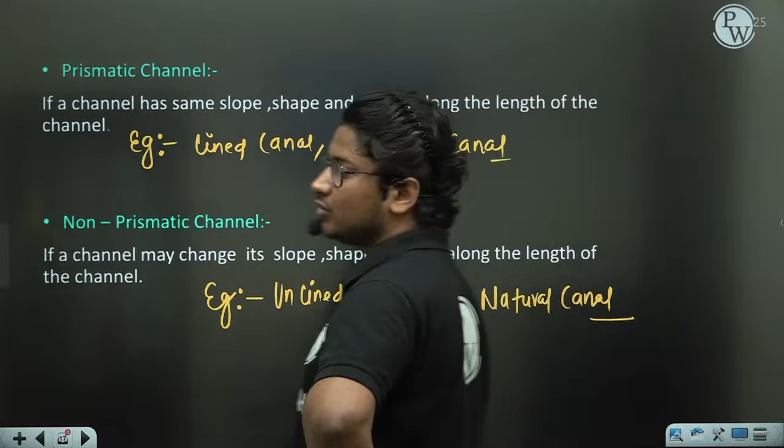Like example also, if you want, you can write it down. For prismatic: lined canal or artificial canal, like man-made canal, we call it an artificial canal. For non-prismatic, it will be non-lined canal, unlined canal, and natural canal.

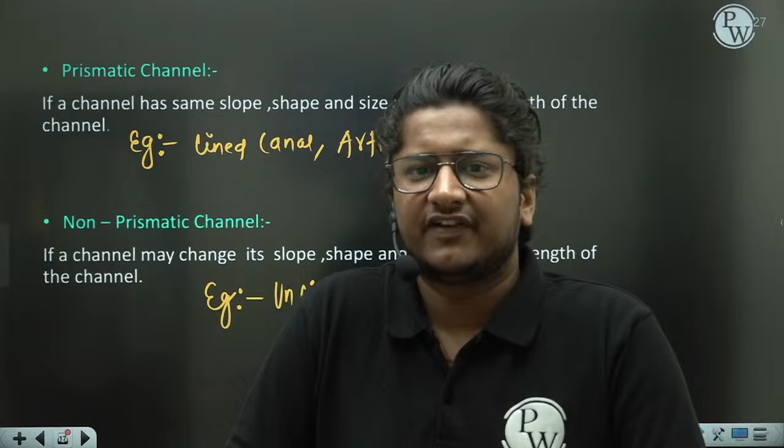So with this 1 or 2 numericals which we can solve, the next topic we'll discuss tomorrow, that is classification of open channel. But 1 or 2 numericals I want to discuss based on today's class, if that numerical is with me. So every day, if possible, I will be giving you 2-3 numericals so that whatever we are discussing becomes more clear. But today is a theory class basically, so here I am giving you 1 or 2 numericals which you all can try or which you all can expect in GATE exam also.

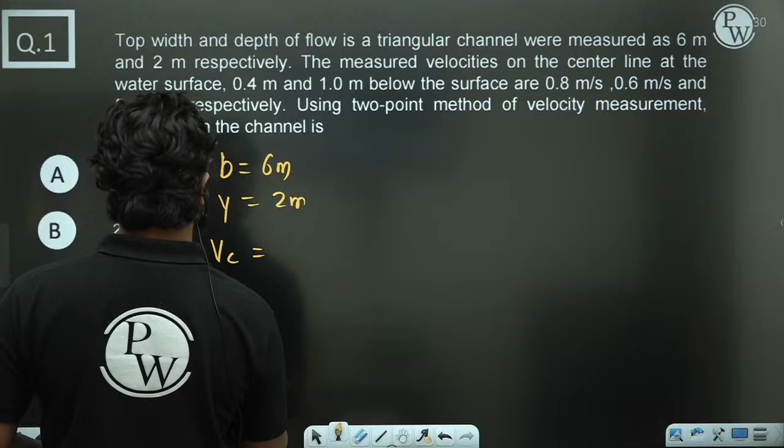Measured velocity at the center line. So VC center line, V at 0.2y, and V at 0.8y. All these velocities are given to you. This we have 0.8, this we have 0.6 meter per second, this we have 0.4 meter per second.

Using the 2-point method of velocity measurement, discharge in the channel is required. So always I told you, whenever you need to find discharge, it will be area into average velocity. Now based on 2-point observation technique, average velocity is the sum of, definitely it will not be the center part, 0.2y and 0.8y points. So 0.6 plus 0.4 divided by 2, it will be 1 by 2 meter per second.

So Q will be equal to area. It's a triangular section, so area will be half into base into height. So 6 into height we have 2, into 1 by 2. So 2 and 2 will cancel out, you are remaining with 3 meter cube per second. That is your final answer, so option C will be the right option.

So Dhrumin, you are giving me A as the answer, that is the wrong answer, bacha. How can you get one? How are you getting one? That's something I'm not getting. Anyone having any doubt regarding this question?